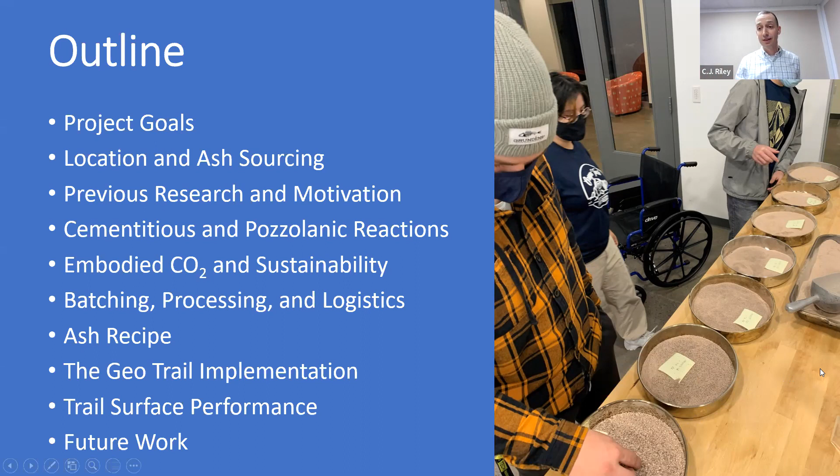We'll tell you about its implementation on a trail we call the GeoTrail, and the performance after we conducted the implementation. And then finally, we'll tell you a little bit about some of the future work that we're going to be doing at Oregon Tech as a result of this project.

So the project goals: this was an implementation project. The requirement was that we had done some prior research, and there are a number of prior projects that I want to tell you about. It had to be a field scale implementation. We chose a section of trail near the campus that had good slopes. And the big issue for us was really practical issues.

A lot of the prior work had been done. We were working on material handling, batching, mass handling of materials, how we would apply the material, and then finishing the trail surface. So the big goal was to improve the surface firmness and stability. And someone mentioned smoothness and size. We were constrained on size, but certainly roughness or smoothness was something we were considering as well, and I'll talk about that.

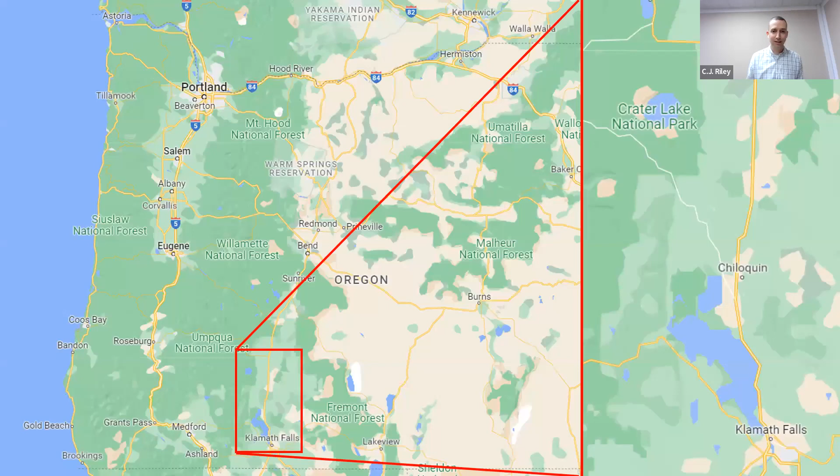Ultimately, we wanted to create a platform for long-term performance studies because this gave us an opportunity to do so on a fairly long section of trail. And because Oregon Tech is really dedicated to our students' learning, we wanted to engage them throughout the process. So you'll see them in a lot of these slides as well. I'll hand it to Ashton to tell you a little bit about where we are.

Thanks, CJ. So I thought I'd provide a little bit of spatial orientation and context for our study area. Oregon Tech is located in Klamath Falls, which is in very southern Oregon. For those of you not familiar with this region, we're a rural community in a high desert ecosystem with access to a lot of nearby natural resources. You can see that we sit just east of the Cascade Mountain Range and about 50 miles south of Crater Lake National Park, which you can see most clearly on the right-hand side of the map here.

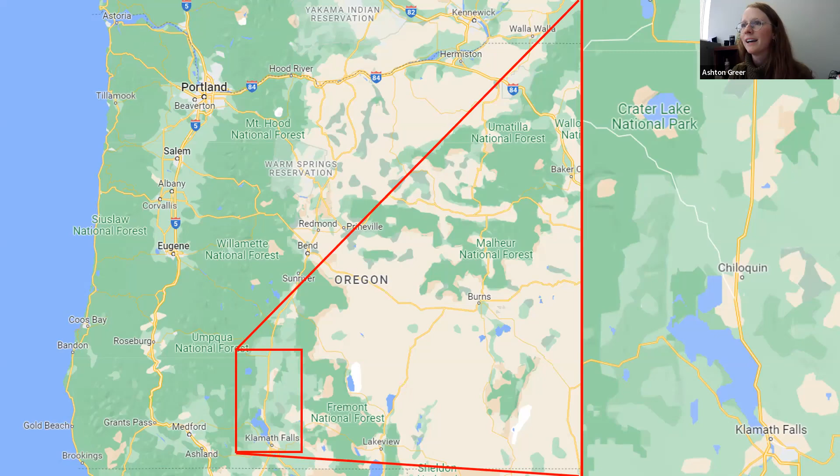Like other mineral deposits, Mazama ash can be extracted, and some operations have begun to extract Mazama ash for commercial use. One of these operations currently retrieving raw ash material is Beaver Pumice Mine, which is located just south of the town of Chemult, Oregon. This is about 10 miles northeast of Crater Lake, and it's a really easy trip up State Highway 97 for us, taking about an hour to get to from Oregon Tech.

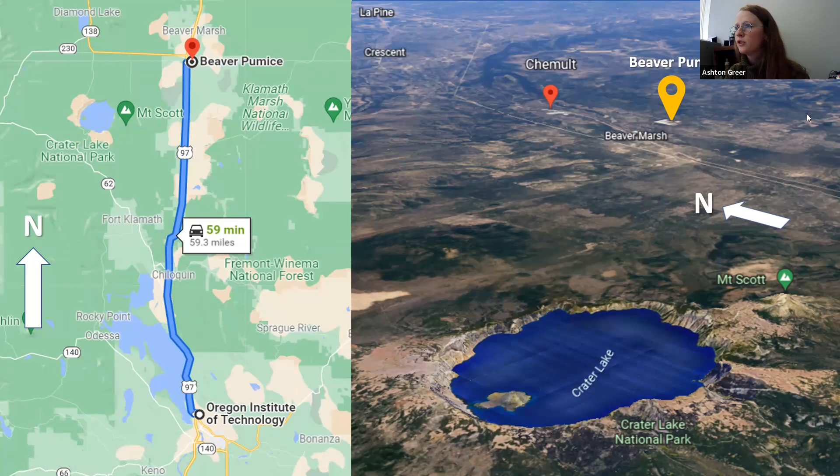Beaver Pumice Mine produces pumice products from a quarry in Beaver Marsh, and you can see some of their operation in the photos on the next slide. Their processing can involve separating these volcanic materials by gradation or even grinding those materials down to achieve a desired size. They currently primarily market their products for small scale agricultural applications, but they're interested in exploring other potential uses of their ash products as well.

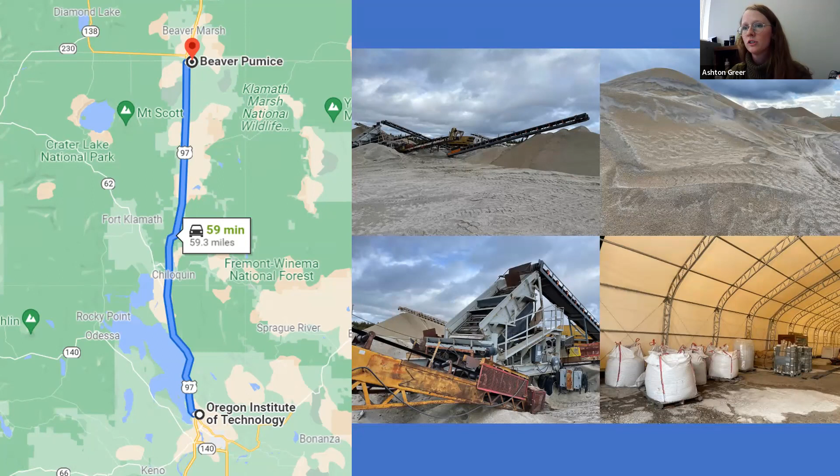So the Geo Trail is an approximately 2-mile hiking and snowshoeing trail just east of our campus. It was completed in 2016 as a collaborative effort between Oregon Tech, the nearby Sky Lakes Medical Center, and Klamath Trails Alliance. So again, that kind of local nonprofit who helps build and maintain a lot of our local trails.

It provides access to some really scenic terrain, and while it's used by people all across the community, some of the more frequent users are Oregon Tech students, medical center patrons and employees, and residents of the nearby Crystal Terrace retirement home. So we identified a 0.2-mile section of the trail on which to apply our surface treatment. You can see here, and we chose this section for one, because it was really easy for us to access immediately adjacent to campus, and also because the slope of this section is already within ADA regulations for walkways.

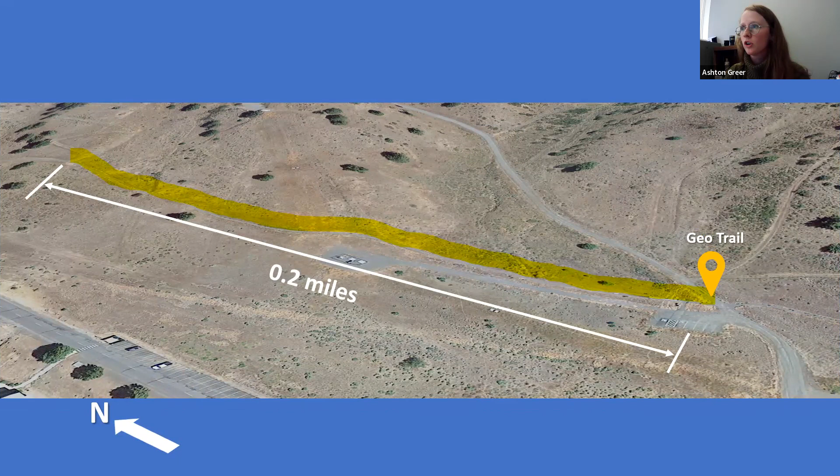So having set up a bit of context for the location of this study, we'd like to take the time to recognize that Oregon Tech resides on Klamath, Modoc, and Yahooskin land, and we think it's really important to acknowledge that as we continue to engage in this work on this land and with resources that are being extracted from it. So I think a deep motivation of this work is to responsibly steward access to this land so that it can be enjoyed by everyone.

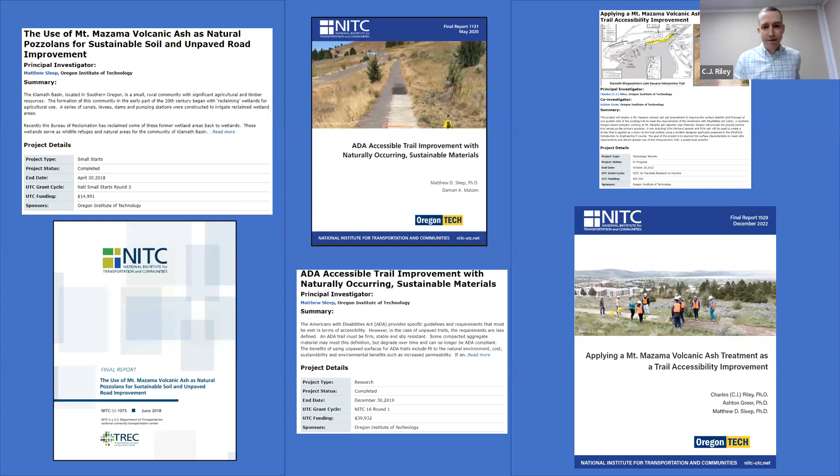Thanks, Ashton. So here we have 3 different studies. The first one on the left was a preliminary study that attempted to use the Mazama ash as an improvement for unpaved roads, in particular levees in the area that are composed of poor soils and often have roadways across them. A second study by Matthew Sleep, one of our former colleagues, tried to focus in on accessibility improvements and really started us thinking along these lines.

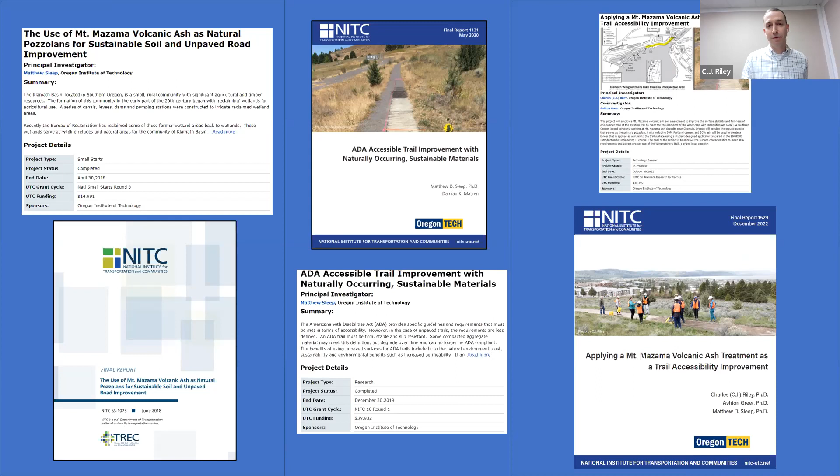There were thousands of mortar cubes cast and broken in this study that really gave us a good idea of how this ash performs when it's combined with different cementitious materials like Portland cement, like lime, and other products. Our study attempted to scale up their test patches that are seen in the photo in the center and apply this to a 0.2-mile section of trail so that we could better assess the performance of the material on a longer trail. So that's the study we're going to tell you about now.

A lot of this is built on a study called the National Trail Surfaces Study that was conducted in 2014 that focused on 11 different types of materials on trail surfaces in Indiana. And 3 of them were limestone-derived aggregate trail surfaces, fairly natural, but different gradations. 8 others were commercial topical products. And in the end, the topical products didn't perform as well. They generally left crusts or they failed at the edges. And so the natural products became the real recommendation.

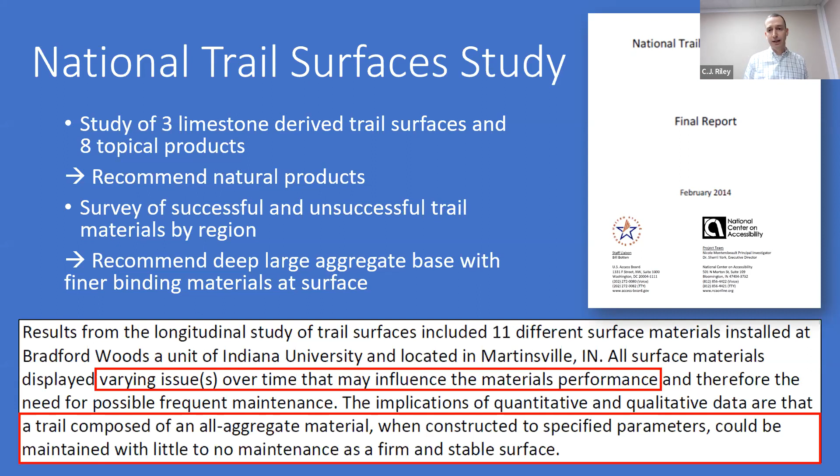The group also surveyed a number of trail managers around the country in different regions, and found that in general, those trail managers would recommend as deep as possible an aggregate base, and then a finer binding material at the surface. And that ultimately trails composed of primarily aggregate surfaces were easier to maintain. Oregon Tech research, though, was really focused on trying to bind the top surface and make improvements in the firmness and stability of that surface.

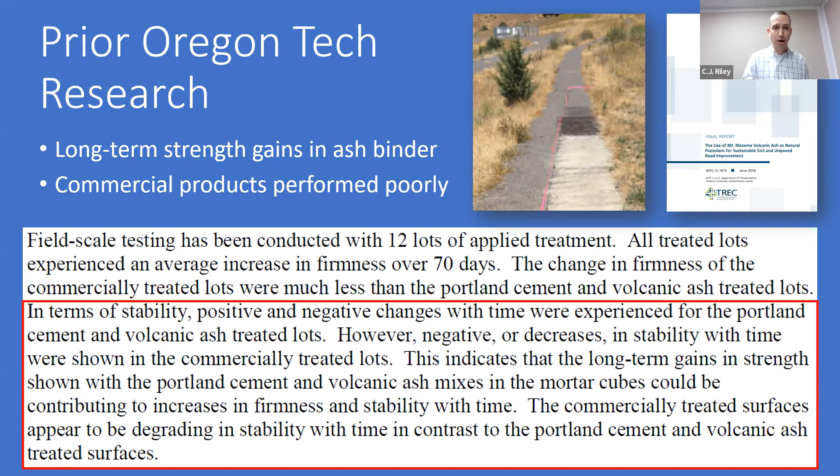So commercial products were also tested and with similar results. And the long-term strength gains for the ash cement binders appeared to improve over time, giving us an idea that this really held some promise. Some of the details of that work are shown here. This is compressive strength on the y-axis versus the ratio of ash to Portland cement on the x. As I said, thousands of mortar cubes were cast.

They effectively showed that the upward pointing arrow on the left tells us that pozzolanic activity is happening, that the mortar cube would strengthen up to 28 days, the dark circles, and beyond that would continue to gain strength, which is indicative of pozzolanic activity. It was clear and expected that the strength of those mortar cubes would drop as the ratio of volcanic ash increased. And so we identified a sweet spot here at right around 50-50 ash to cement in the binder that we would use.

Some of the other issues, though, that this study found were that the fineness of the raw ash was not as fine as necessary to characterize this as a class N pozzolan. So some grinding or processing would be necessary to use it that way. And then attempts were made to apply this as a topical treatment to some ash surfaces, and issues around clogging were identified.

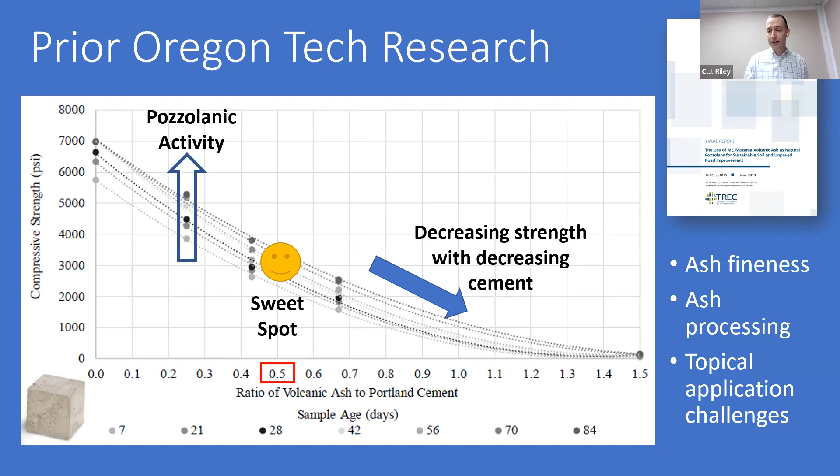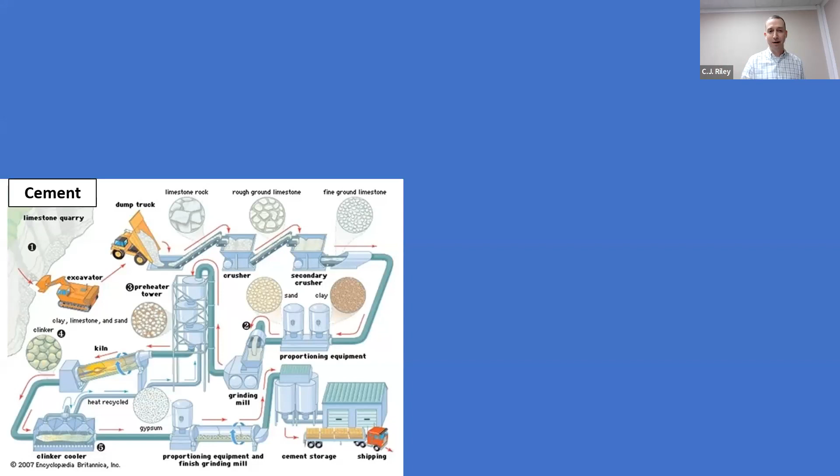And so those were some of the challenges that we knew we were getting into when we started our work. I'm going to hand this back to Ashton to tell you a little bit more about materials, and then I'll come back and tell you some more about how we developed our batches.

Great. So when we're thinking about these materials, I think it's important to consider the energy and resources required for cement versus natural pozzolan production like Mazama ash. So Portland cement is manufactured by extracting limestone, crushing it and grinding it down to a much finer material and heating it in a kiln to form a substance called clinker. That clinker is then cooled and ground to an even finer powder that we can then use as Portland cement.

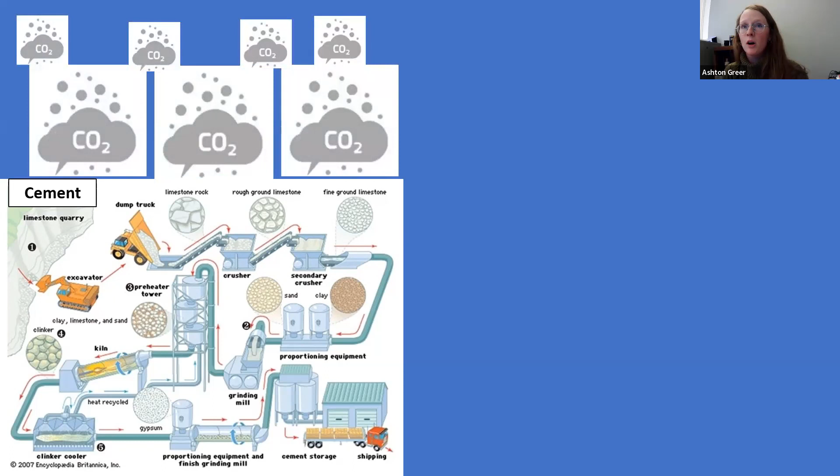Portland cement is often shipped across long distances to reach its destination. And so this is ultimately a really intensive process that has really extensive embodied carbon costs. Mazama ash is what we would consider a natural pozzolan, and these often require significantly less processing. So once extracted, they might only need to be crushed or sorted. And as a substance that's naturally occurring across the Pacific Northwest, it typically requires far less shipping distances.

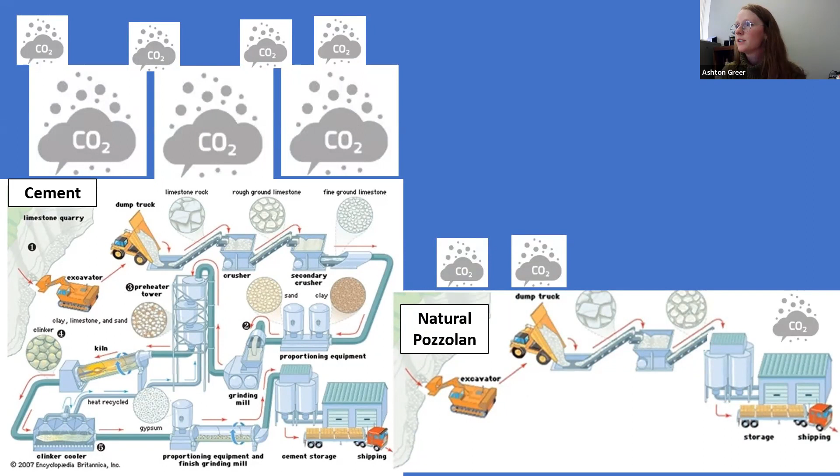Even though Mazama ash isn't present across the entire US, there are different types of naturally occurring pozzolans across the world. So ultimately, this can mean far less embodied carbon tied up in natural pozzolan usage. Sleep and Masley evaluated the embodied energy associated with production of some common combinations of various cementitious mixtures, and found that Portland cement had the greatest embodied energy, while mixtures incorporating natural pozzolans tended to have much lower embodied energy. And so you can see our combination of ash and Portland cement there on the right.

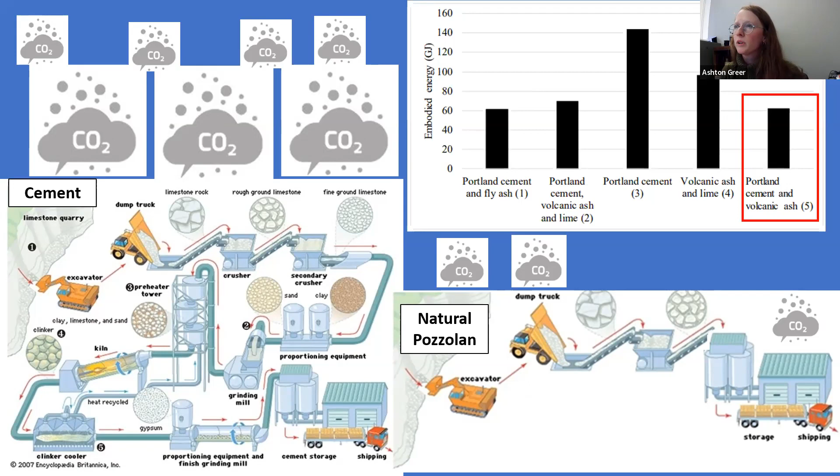So hydraulic cements like Portland cement become adhesive through a chemical reaction between the dry ingredients and water. Hydraulic cements are essentially made up of a mixture of silicates and oxides that react directly with water to form the hydrates calcium silicate hydrate and, secondarily, calcium hydroxide or lime. These compounds act as adhesives that bind other materials together and gain strength over time as they cure.

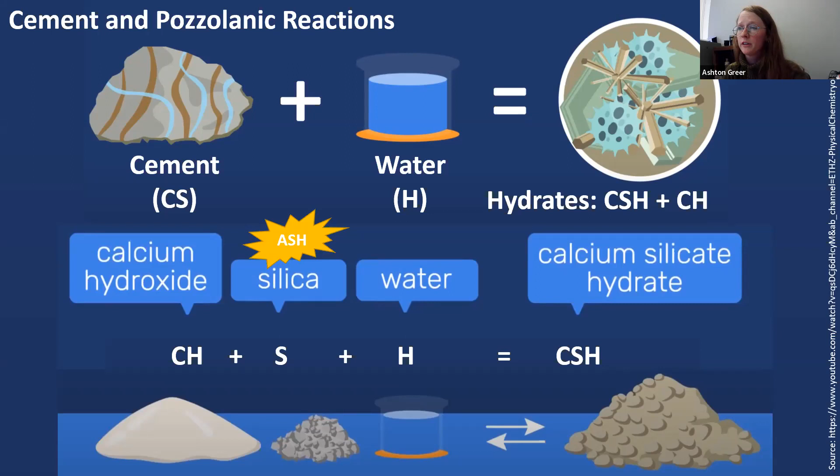Pozzolans like Mazama ash are siliceous materials that in the presence of Portland cement and water will basically react with the calcium hydroxide released by the cement hydration to form compounds possessing cementitious properties. So alone, they possess little to no cementitious value at all, but in the presence of cement, they can create reactions that continue adding strength for even longer periods of time than cement alone.

And there's a lot of historical context for using natural pozzolans in infrastructure applications. So there's historical record of natural pozzolans being used to construct structures as early as ancient Greece. And notably, Roman concretes consisted of a mix of volcanic ash, lime, and water, and many of their roads and structures still exist today, 2,000 years later. So this durability is obviously of significant interest to concrete researchers, but somewhat remained an enigma.

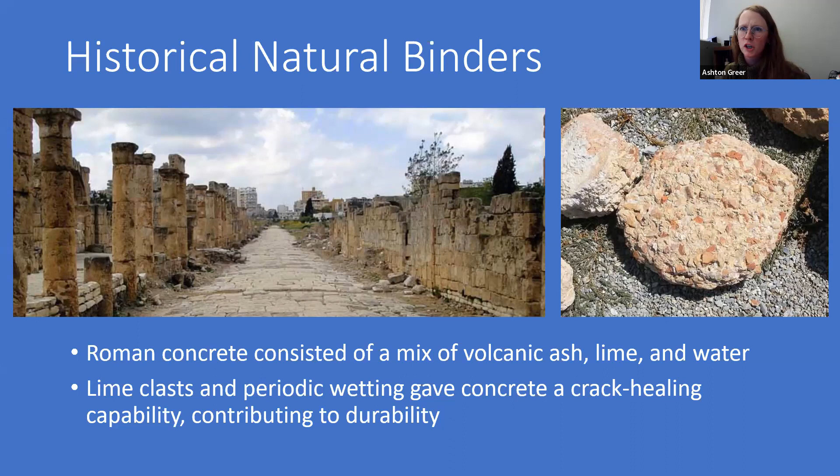However, a recent MIT study suggests that some of this durability can be attributed to these distinctive groupings of highly reactive lime called lime clasts, and they serve as reserves of reactive calcium for pozzolanic reactions over a really long term, resulting in cracks that are essentially self-healing.

There's also context for using cementitious materials to improve our natural soil surfaces. So cement stabilized soils are engineered mixtures of in situ soil, water, and cement, resulting in semi-bound to bound material. They're frequently applied to improve subgrade beneath roadways. They can provide significant improvements to the working platform and permanent soil modifications, and they can reduce the need for thicker pavements and potentially increase pavement lifespans.

So in their application, the cement is most often applied in a dry condition, but it can also be applied in a slurry form. And once it's spread, it's generally mixed into the subgrade material and then moistened and compacted. And this often takes place in sort of a convoy, so heavy equipment, one after another, performing these steps in sequence.

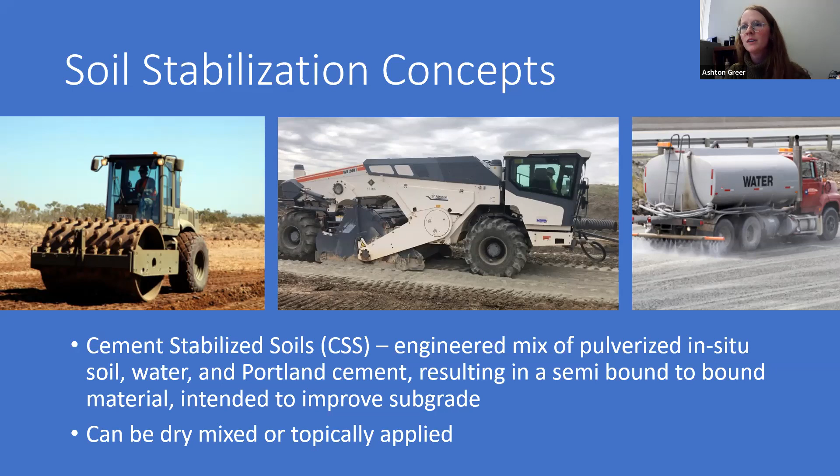So I think we're kind of drawing from all of these things to try and answer this question of whether there's something in between a natural surface and a traditional pavement that could be used to provide accessible trails while also optimizing costs and sustainability considerations. So can we take what we know about traditional pavements, natural surfaces, pozzolanic reactions, and soil stabilization to sort of use Mazama ash to thread that needle between the options that are currently out there? So I think there are a lot of challenges in answering that question that CJ is going to talk about.

All right, thanks. Yes, the challenges were many. The first was really batching and processing. So initial studies had suggested we needed to either work with the finer material in the raw ash that we had available or pulverize it somehow to make all of the material more fine. Both of those things sounded labor, time, energy intensive to us. And so ultimately we avoided them. And I'll show you how in a future slide.

The other issue we had was on application and logistics. And the previous studies had suggested that topical application was going to pose a challenge. We still had some students who wanted to dig into this, and they produced this wonderful prototype of something that could mix our material into a slurry and disperse it onto the site at a precise rate that was going to be effective at letting it infiltrate into the existing ground.

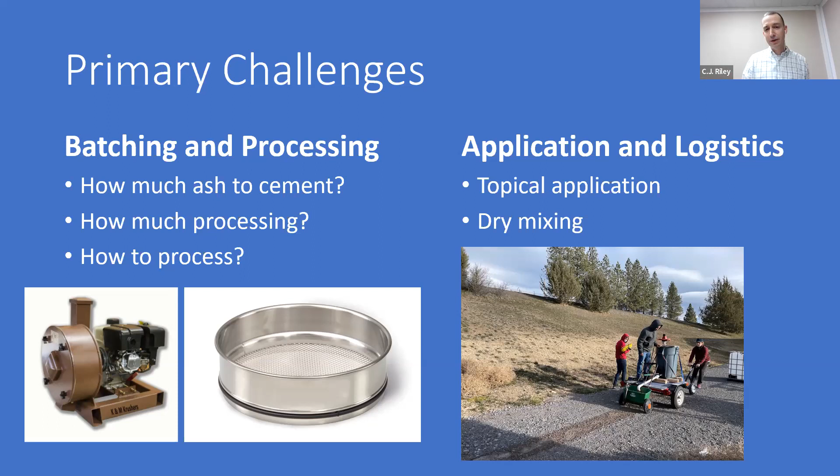So they made numerous attempts at that, and we quickly realized that if we were going to apply that over a 0.2 mile trail in multiple widths along the trail, it was going to be really challenging, time consuming, and difficult to move material. So we opted for a dry mixing approach that I think worked a lot better.

If we get back to the material side of things, here's some of the raw ash material laid out in sieves, and you can see that some of the material is fairly coarse, like a coarse sand, and some of the material, really the ash that we had determined was more active and performed as a pozzolan, was the finest ash that we had. And it would pass, as you can see here, a number 325 sieve.

If you're not aware of sieve analysis, a 325 sieve produces something that's about as fine as a makeup compound. You can barely feel it. It feels very smooth when it's between your fingers.

So the raw ash itself, when put through a number of dry sieves, only gave us about 14% of that finest material. But when you run it through a wet sieve or a washed sieve on just the number 325, we could see that 30% of our material was passing that 325 sieve. So that told us that 30% of our raw ash was this fine material that we could rely on to behave pozzolanically.

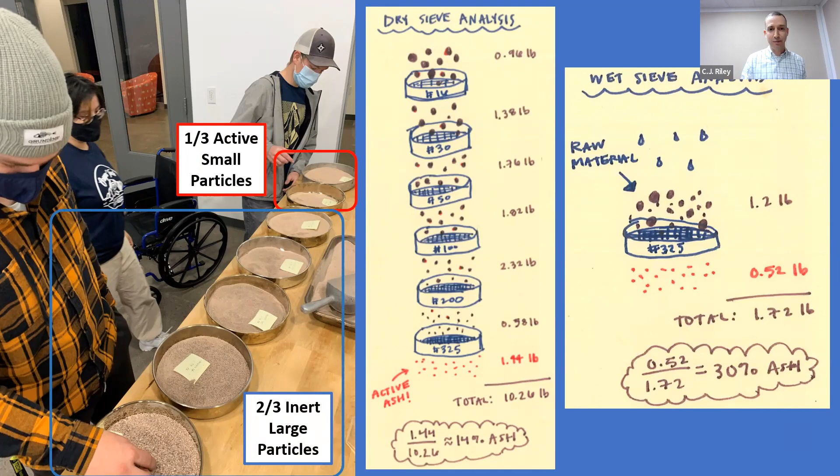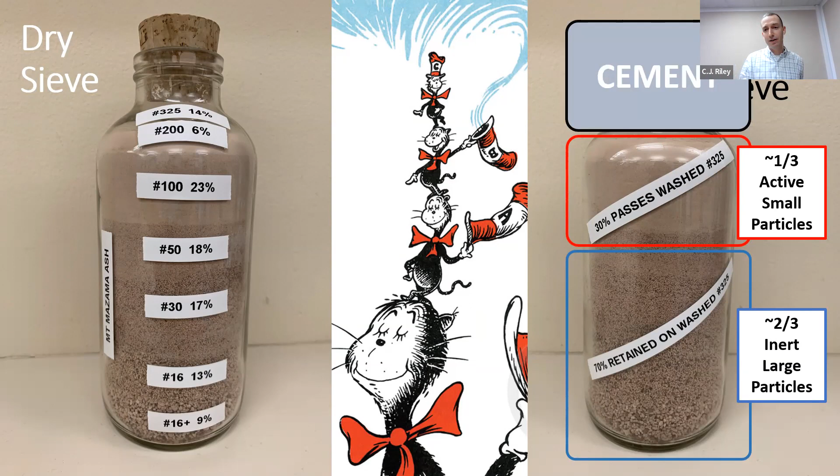So in the same way, we've got these small particles that are the most active, and that was our goal in working with the ash. You might remember I said we were going to work with a 50-50 ratio of ash to cement. So it's these 1/3 active small particles that we would match in proportion with cement. And that gave us our batch that would give us 3 parts raw ash to 1 part cement. So ultimately, that was our recipe.

3 parts ash, 1 part cement, a trail, and some water. You mix the dry ingredients together so they're interspersed well, spread it on the trail surface, apply water, and move across that surface with a compactor. And that was really our approach for this project after a lot of trial and error with our students.

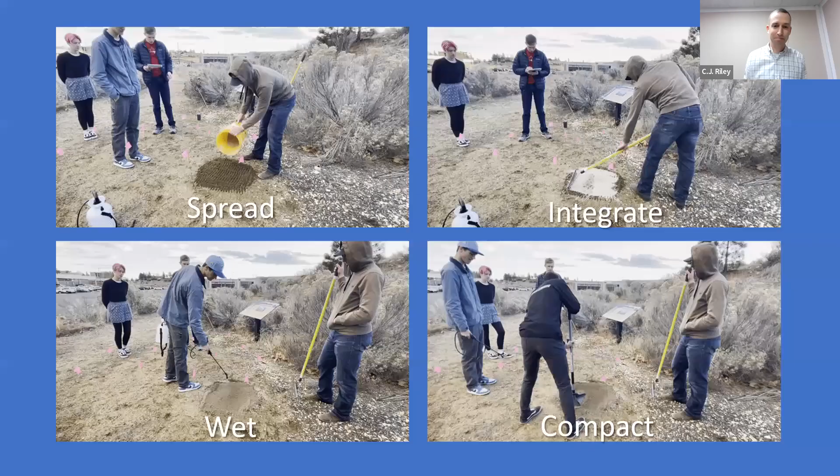So our students are really kind of the chefs in the kitchen for a lot of this. I probably can't emphasize enough how much they have contributed to this work. So here you can see some of our students helping us apply some small test patches.

In that first figure, they're applying a pre-mixed ash cement mix to the surface in its dry form. And then in step 2, they're raking it in an attempt to integrate it with the in situ soil. Third, they're adding moisture, and then they're finally compacting it with a plate tamper.

So we refine these processes through small scale testing like you see here, while keeping in mind that in most applications, we would probably need to be applying the surface over a much larger area. So when we applied our treatment to the Geo Trail last May, we mobilized a crew of about 20 student volunteers and kind of drew inspiration from the convoys that we typically see in roadway construction.

So we mixed our dry materials on a much larger scale and used a small front end loader instead of 5-gallon buckets to transport the mix to different areas of the trail. I think we ended up doing about 33 trips back and forth along the trail. Of course, those trips got shorter and shorter the more progress that we made.

Behind that, we had a team of students spreading the mix and integrating it with the existing trail surface. And they were followed up by groups who wet the surface and then compacted it with a plate compactor. So in this manner, we were able to resurface our 0.2-mile section over the course of about 7 hours on a Saturday. Overall, we used about 4 cubic yards of ash, 1.3 cubic yards of cement, and about 1 cubic yard of water.

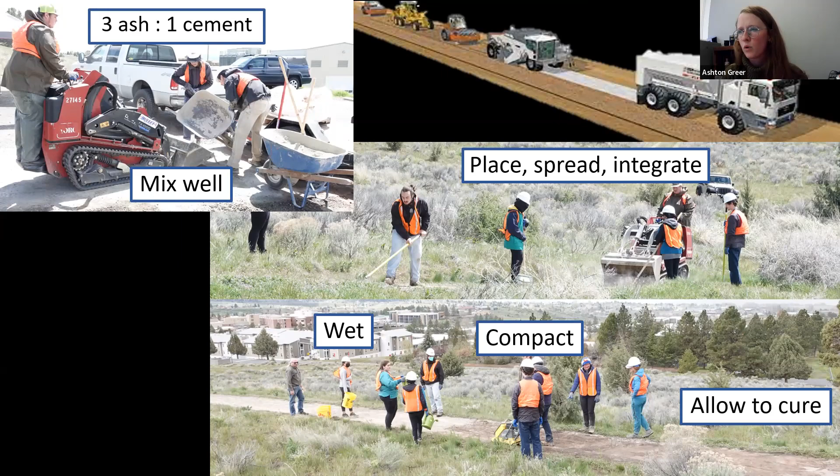So I think that really developing an application process that we could actually execute at a larger scale was the beginning of our understanding of the Mazama ash treatment. But it's definitely not the end. So I'm going to let CJ talk about some of the things that we've learned since applications and some of the questions that have come up since then.

All right, the first thing we did, consistent with the prior studies and really as a way of measuring what we had planned to measure, was to look at firmness and stability. And this is based on an ASTM standard and a device called a rotational penetrometer that's produced by Beneficial Designs.

The firmness measurement requires the user to stand on the sides of this device and then release the wheel into the ground where a prescribed force is applied and the resistance is measured in terms of the deformation. So how far does that wheel then penetrate into the surface when released straight?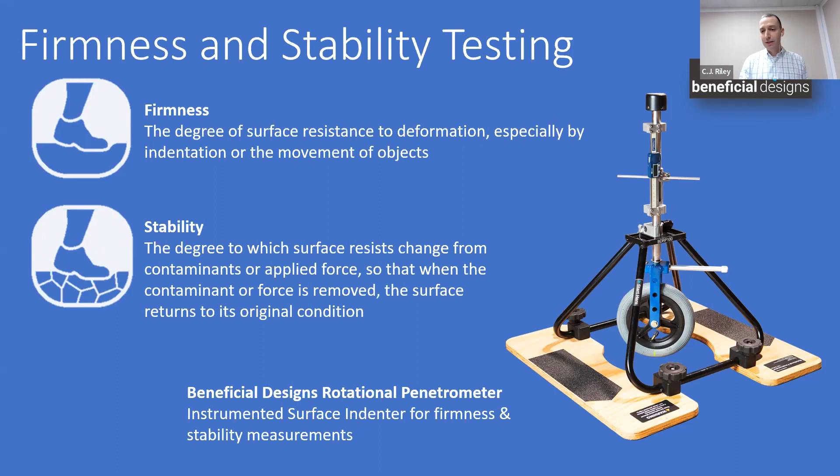They were treated, but they were inconsistent. And then there were some areas where it was clear that moisture hadn't really penetrated or been integrated as well as it maybe ought to have. And that was the treated loose material.

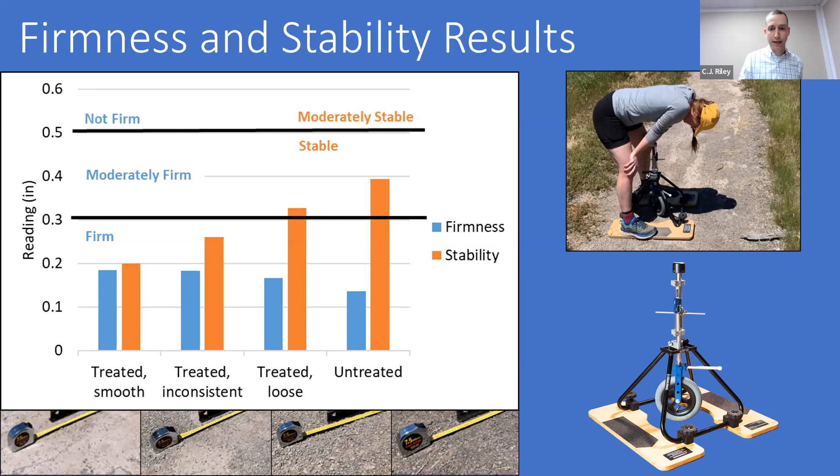We also wanted to look at surface roughness. So somebody mentioned smoothness as a factor, and it certainly is. And in fact, there's a measure called the Wheelchair Pathway Roughness Index and an associated ASTM standard. But that standard really relies on a laser measurement of roughness. And so it's actually inappropriate for something like this with loose material on the surface. It's really intended for pavers or sidewalks or places where there might be gaps that would cause roughness.

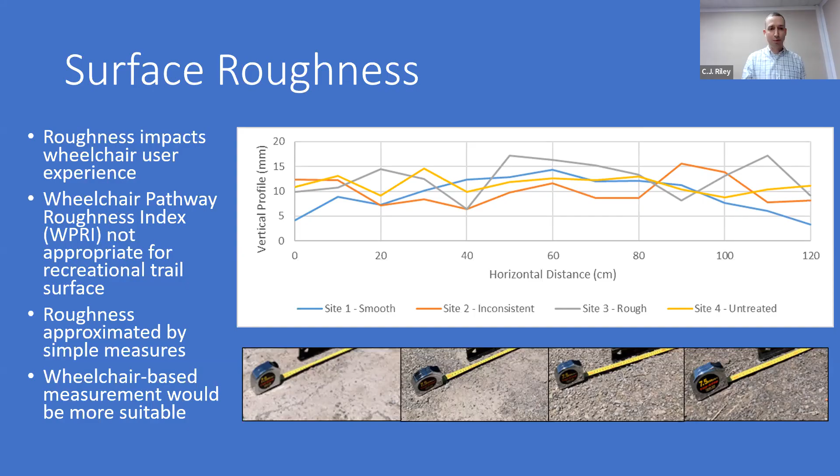So for a variety of reasons, we didn't measure this, but we did go out to try and measure relative elevations along the length of this and kind of get around the aggregate. And you can see the blue line here is relatively smooth location to location. We took measurements every 10 centimeters, so you can see where those kinks are. The changes in elevation are relatively small, but as you get into the rougher and even the untreated material, you can see where those changes in elevation are more significant. So it was pretty clear that we had made improvements in smoothness.

But all of the things that were positive about this trail really started to degrade. And I want to show you a timeline that shows us what happens over the course of about 6 months, 7 months with this project. So these are less than a month after implementation. And you can see here on the left photo that we've got a relatively smooth, consistent surface. And that was true in a lot of places along the trail. There were other places where, again, you can see the aggregate is exposed, it looks looser, and there were spots where the material simply wasn't bound as well as it could have been.

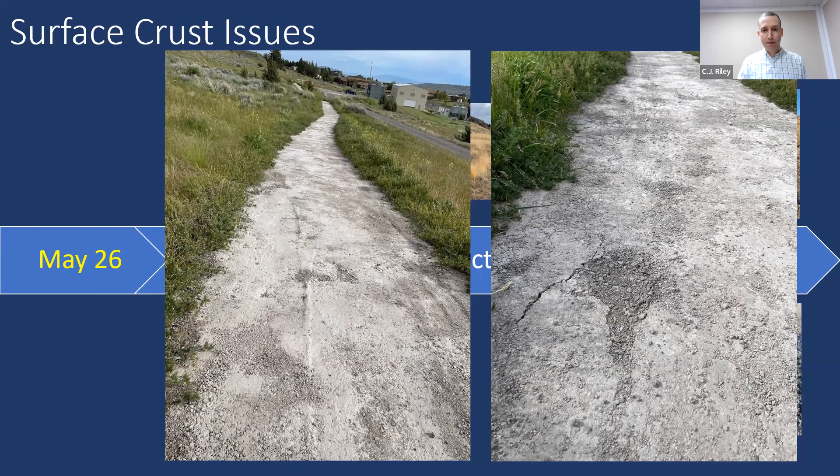If we move into June, we did have quite a bit of moisture in our spring this year. So there was some additional wetting, maybe some additional moisture helping us bind material. But we did start to see lots of use. We didn't close the trail and it wasn't allowed to cure in any meaningful way. So people were active on the trail right after the implementation. And you can see how some of this is breaking down. This photo is right at the start of the trail, and you'll recognize that bench there in another photo.

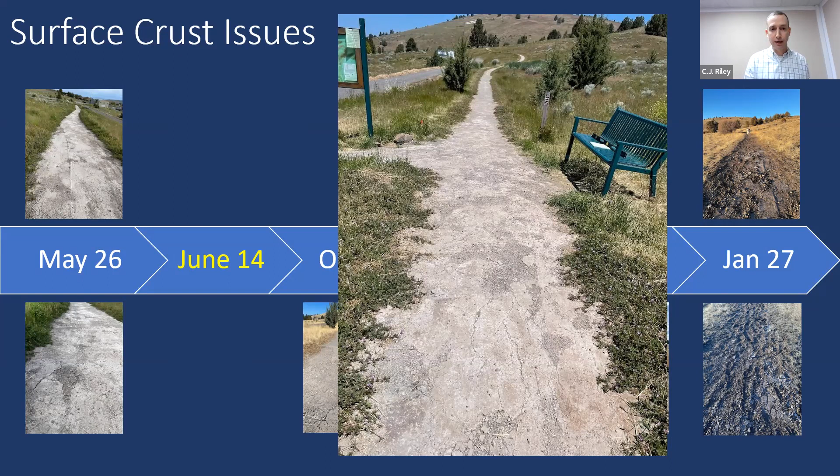A little farther down the trail, you can really see how some of the well-bound material created a surface crust. And this is something we were concerned about at the beginning of the project. We had other trail managers interested in the project, but they were concerned that this might occur because we're hardening a surface and we're leaving softer material beneath it. And as we weren't too sure what would happen and how deep we would be able to implement the treatment, we opted to try it anyway.

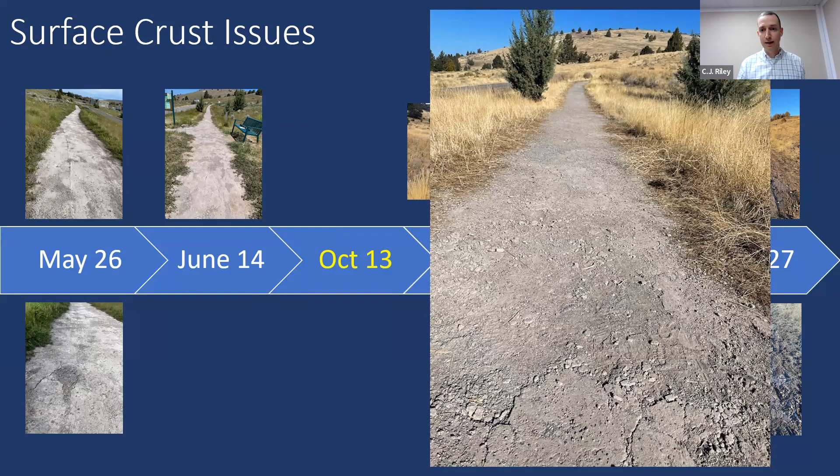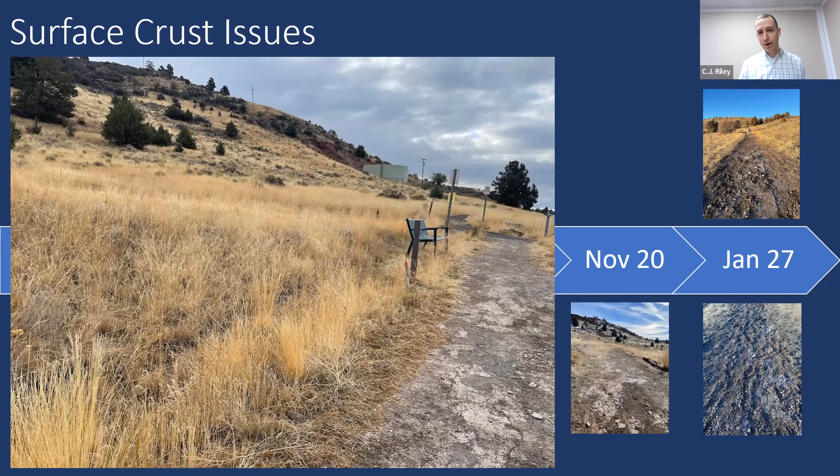And you can see now at the start of that trail and getting later into the year, we do have more degradation of that surface. So as well as some of this material was bound in spots, it's simply not strong enough to stand up to foot traffic, wheeled vehicles, and that sort of thing. Getting into the winter after some snows, some freeze-thaw, is detrimental to pavements of any kind. We've got further deterioration. You can start to see some of the native soils appearing where the trail surface has really broken down.

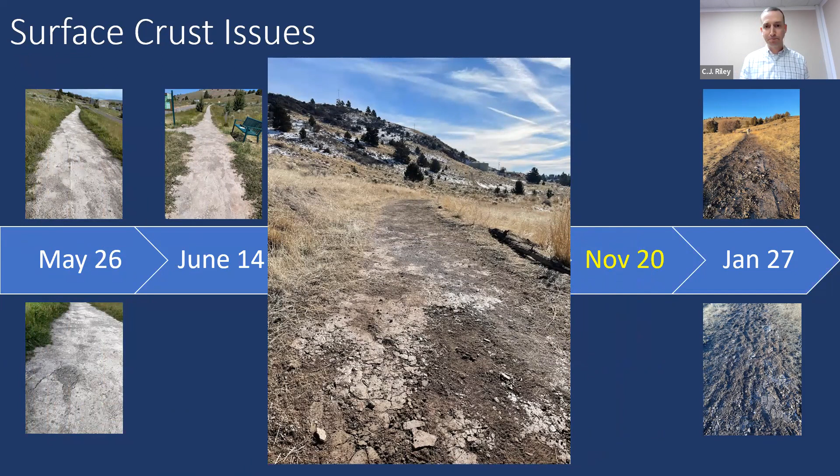And then still farther into the winter, a lot of the soils here are also expansive in nature. So if they go through wetting and drying cycles, they tend to fluff. And so it's pretty clear that there are some challenges with this location, with this binder, and it's not quite right.

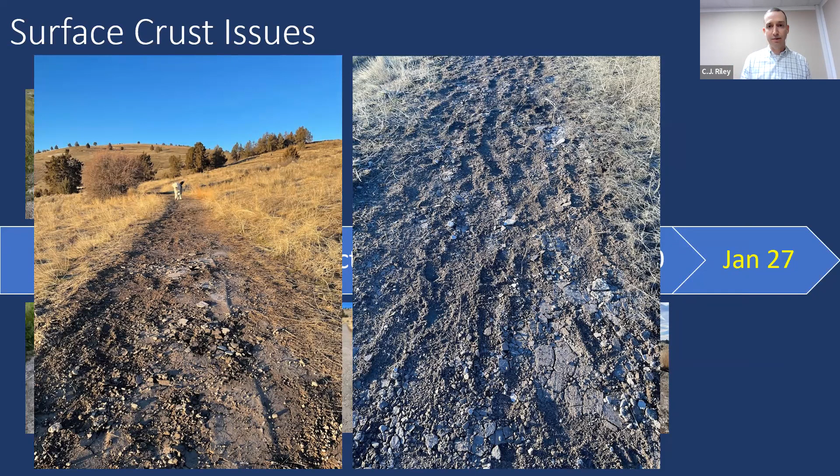But we think we solved a lot of problems in terms of batching and placing, but we want to now look at a lot more of these issues, primarily water, distribution of water, depth of penetration, and mixing. We had organics on the trail that may have played a role in weakening certain sections. We certainly want to look at the aggregates and the size of aggregate that's on the trail or incorporated into the surface. And then the soils themselves there will play a significant role.

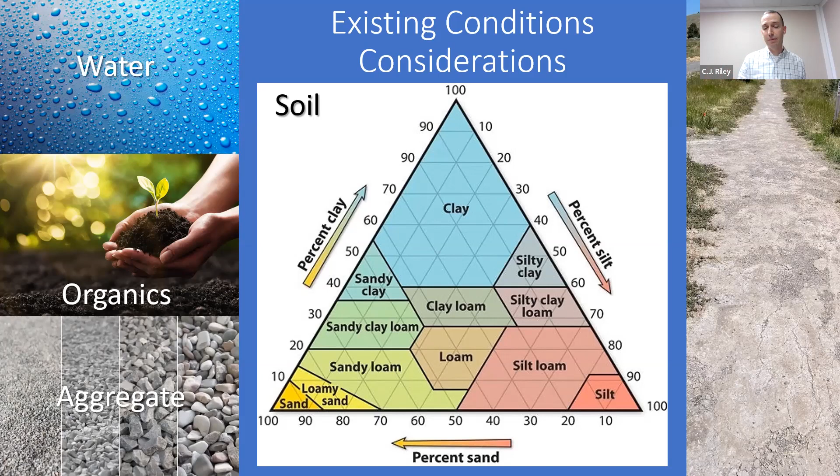We're integrating this binding material with native soils. The soils we have here are really silty loams, and that's relatively fine material, again, expansive. So it played a big part. And then the seasons with wetting and drying are going to be different in different locations regionally, but here that's a really significant factor.

So I think the main takeaways from this work start with the idea that ash and cement is a cementitious binder, but it tends to perform differently in different conditions. So it's heavily dependent on things like soil composition and conditions, moisture levels, and uniformity. And we didn't control any of those aspects in this implementation. So we think that the inconsistency in our results probably reflects that.

We did develop a treatment process that's feasible over relatively long sections. So I think we accomplished our goal of scaling up our application technique. However, I think that feasibility does come into question when you consider how often maintenance or reapplication might need to take place. Mobilizing a crew of people and equipment might be feasible for a one-time application, but becomes less so if reapplication needs to take place frequently.

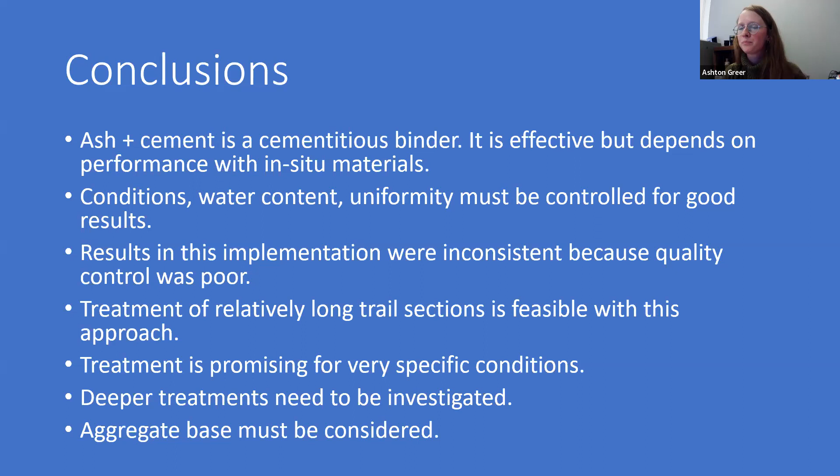But even so, we think that treatment is promising for probably very particular conditions. And we aren't yet sure what those particular conditions are. So we need to move forward on this and consider things like deeper treatments and different aggregate bases and all of these additional conditions as we move forward. So we're continuing to explore these things.

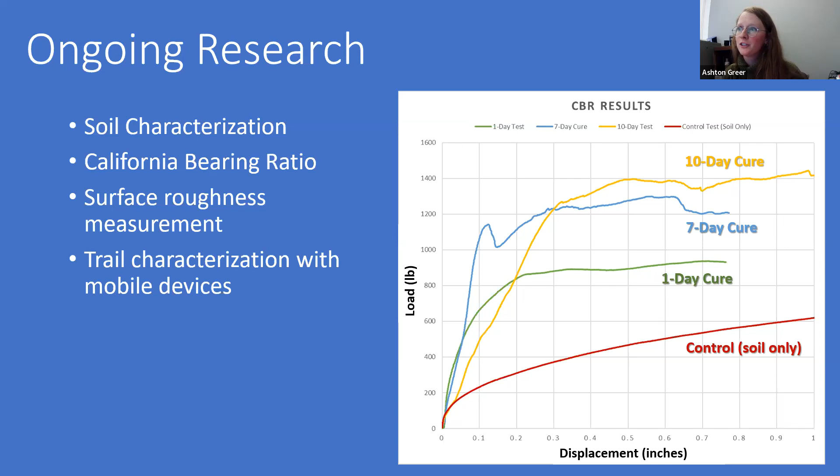Some members of our team have conducted some preliminary studies in an effort to characterize the soil at the Geo Trail. A CBR test showed that soil samples with a layer of ash treatment had higher load capacity than the control, which contained just untreated soil. And we're looking at the potential of using mobile devices to better characterize the trail surface, particularly things like utilizing cell phone-based accelerometers and LiDAR sensors to better measure surface roughness.

And we're trying to weave all of these things into the experience of our undergraduate students. So like CJ said, Oregon Tech prides itself on providing its students with a really hands-on educational experience. So involving them in this project has been a fantastic way to introduce our students to real research questions, with real solutions that we can take into the real world to apply. So for the past 2 years, this project has been the basis for our Intro to Engineering class.

Last year, the first year students helped us really a lot with answering the questions of how we could apply the surface at scale along the Geo Trail. And this year they're helping us answer the questions of why the trail performed the way it did and how we can improve it. So it's been a really great opportunity to get them involved and out into the field.